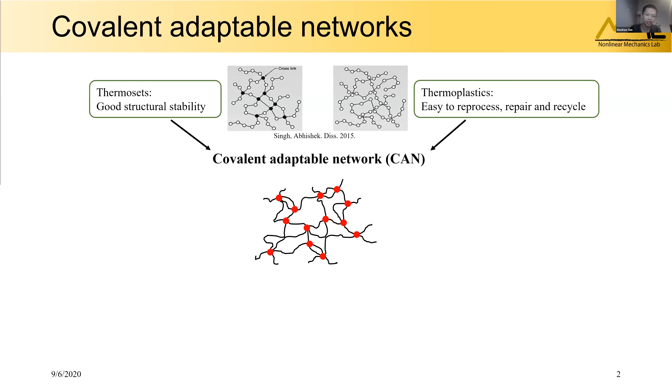Such novel behavior is enabled by the dynamic bonds functionalized into the network. The dynamic bonds can continuously break and reform and result in the evolution of the topology. The bond exchange reaction is a typical class of dynamic reactions. It can be triggered by different stimuli, light or heat.

In a BER, a free unit will get close to a linked bond and form an intermediate group, which can then break into a new unit and a new bond. In this process, the microscopic network is rearranged and the cross-link density is preserved. The repeated BERs will allow the network to flow macroscopically, but without impairing the structural integrity. So many different CAN materials have been developed.

In 2011, the Leibler group developed a CAN material based on the thermally induced BERs. The Vitrimer has shown the capabilities of reprocessing, repairing, and recycling. For example, through a simple thermoforming process, a Vitrimer strip can be permanently reshaped. And for the repairing, two Vitrimer strips can be welded together under heating.

The Vitrimer can also be recycled. The broken parts of the Vitrimer can be recycled to new parts through injection molding. We, in 2014, have also demonstrated the Vitrimer can be recycled from the powder through a heat press process.

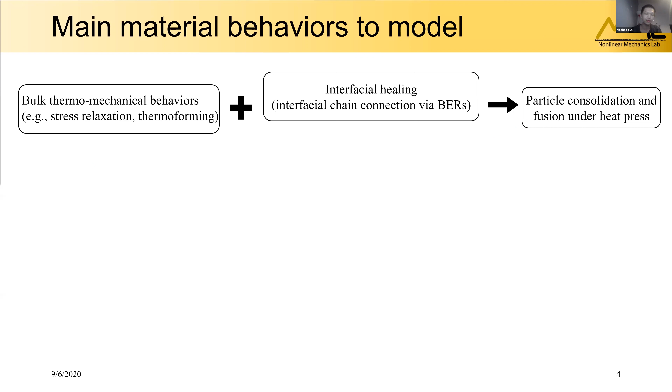So in the above applications, there are two fundamental behaviors, the bulk stress relaxation behavior and the interfacial healing behavior. The two behaviors enable the capability of particle consolidation and fusion under the heat press, which is a fundamental process underlying this powder-based recycling. So our work is to understand and model these material behaviors. We will first focus on the bulk material behavior, the thermomechanics of the Vitrimer, and then using the interfacial healing model developed by Yu, we will study the consolidation and fusion of the Vitrimer particles under the heat press.

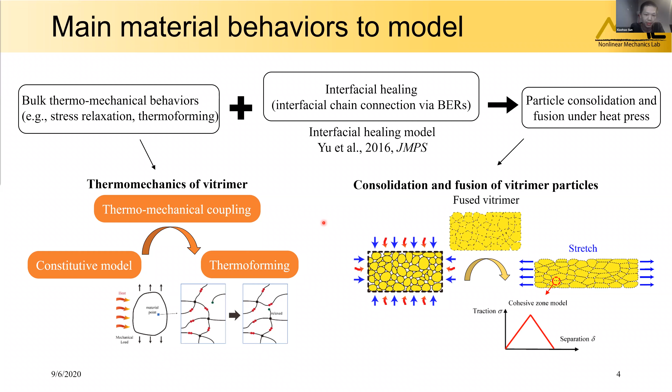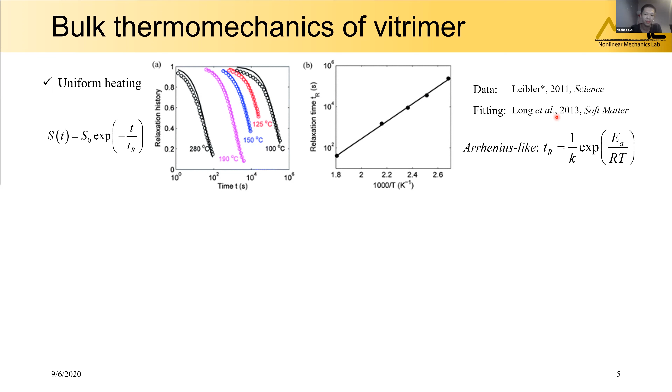So for the bulk Vitrimer behavior, the previous studies have focused on the uniform heating case. Since the reaction kinetics are governed by the Arrhenius law, the material also exhibits Arrhenius-like temperature-dependent relaxation behavior. That is, the relaxation time scales with the exponential of 1 over temperature T. Long in 2013 developed a constitutive model for the Vitrimer, which can capture the experimental behavior of the Vitrimers.

However, for the non-uniform or local heating, the coupling between the mechanical deformation, heat conduction, and the chemical reactions can be more complex. The heat conduction causes an evolving temperature field. This can lead to the evolving deformation field in three aspects: the BER-induced stress relaxation, the thermal expansion, and the modulus change due to the entropic elasticity. So we will focus on studying the coupling between the thermal and mechanical, and study the thermoforming process.

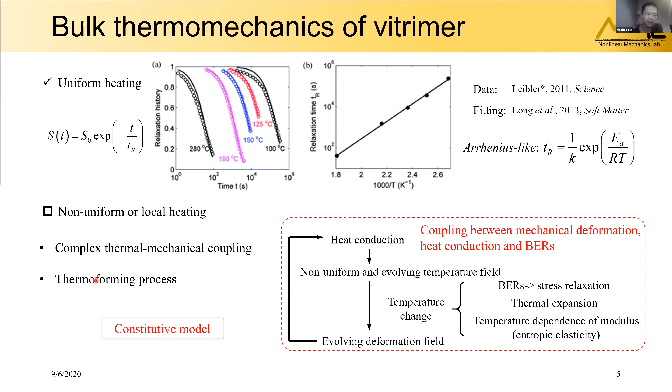So first, I will introduce the constitutive model developed by Long. So consider a material point subject to thermal and mechanical loading. The chains within this point can exchange through the BER. A basic assumption for BER is that the stress carried by a reacting chain will be relaxed after the BER, and the new polymer chain is born at a stress-free state, and it will start to accumulate deformation since its reforming state.

So to obtain the total stress of this material point, we need to track the evolution of the chain composition, that is the original polymer chains and the reformed chains born at different times. So the original chains experience deformation from time zero to the current time t, and the reformed chains born at time tau will experience the deformation from tau to t. So we can sum up the stress of different chain groups and obtain this form for the Cauchy stress. And the evolution of the chain composition is governed by the reaction kinetics, that is the Arrhenius law.

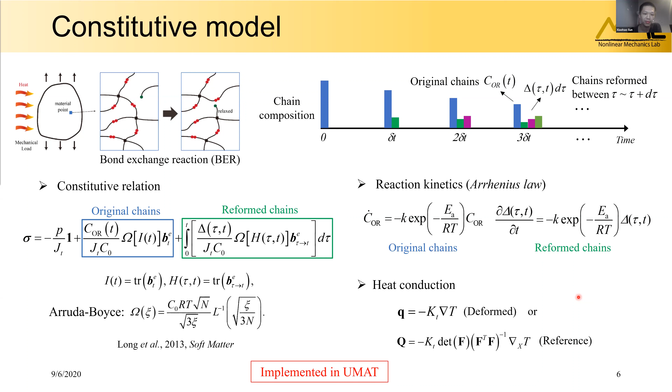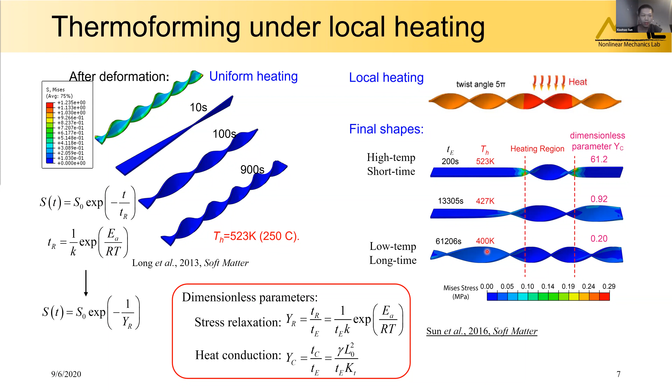There is another example for thermal imprinting. We use a high temperature rigid indenter to press a low temperature Vitrimer substrate, hold the indenter for time TE, and unload. The heat can be conducted from the indenter to the substrate and induce the stress relaxation, so an imprint can finally be obtained.

When the heat conduction is relatively slow, that is, high temperature and short time is used, the high temperature will be confined to the region near the contact interface. Then the localized stress relaxation can cause the material in this region to be compressed more, and then it will creep up due to the Poisson's effect, finally forming the final imprint significantly deviating from the initially deformed profile.

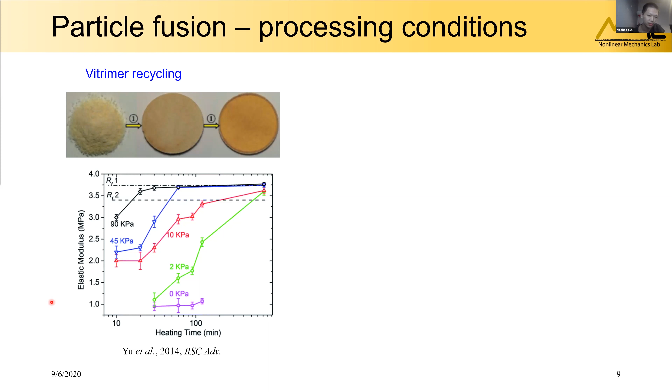So now we go to the particle fusion. This is motivated by two questions. In the application of Vitrimer recycling, different pressures, as shown by different lines, and different heating times can lead to material with different elastic modulus. And in our recent work, we have demonstrated the rapid fabrication of fiber reinforced Vitrimer composites based on heat pressing the polymer powder and the carbon fiber mat.

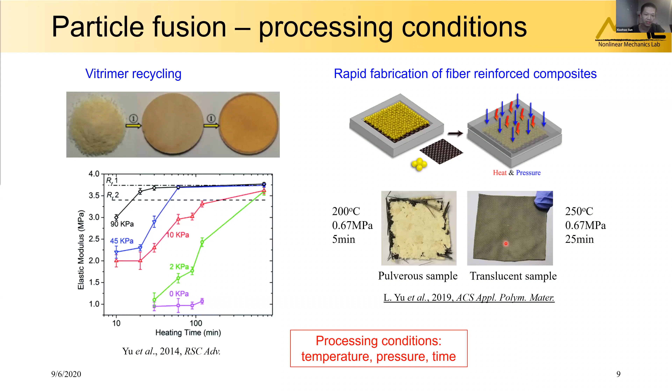We also see that the temperature, the pressure, and the processing time can significantly affect the fusion quality of the Vitrimer matrix. So how the processing condition affects the fusion process is the first question. Also, the Vitrimer powder shows a very random particle size. How the particle size affects the fusion process is the second question we want to answer.

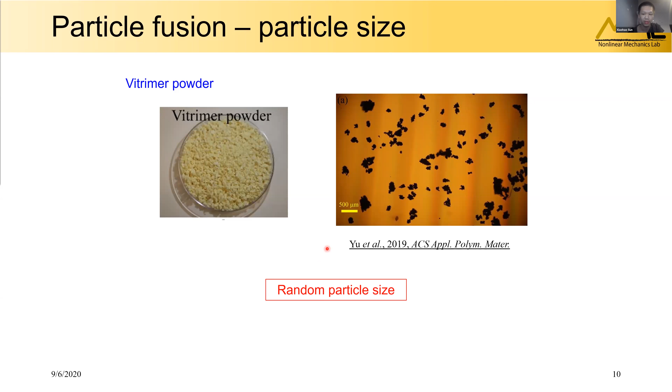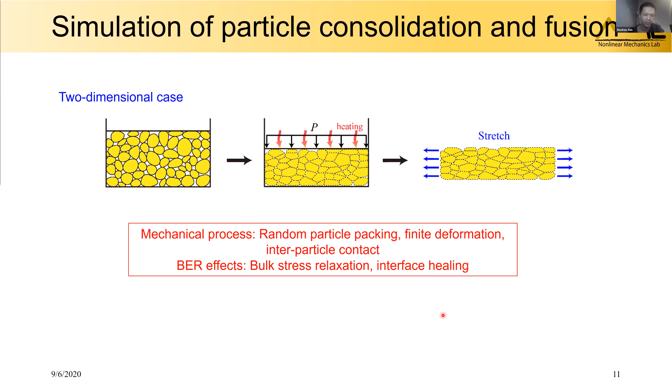So we will build a finite element model for the problem, and the two-dimensional case is considered here. For the mechanical process, the random particle packing, the finite deformation, and the interparticle contact will be considered. Also, the bond exchange reaction induced stress relaxation and interface healing will be modeled. So this is the simulation procedure.

We first put the particles into a box and shake the box to obtain an initial dense packing for the particles. Then we use this packing as the geometry of the finite element model and perform the heat press simulation. During the heat press, the interface healing between the contacting particles can bond the discrete particles into a fused continuum. The extent of the interface healing is governed by the density of the molecular bonds established across the interface due to the BERs.

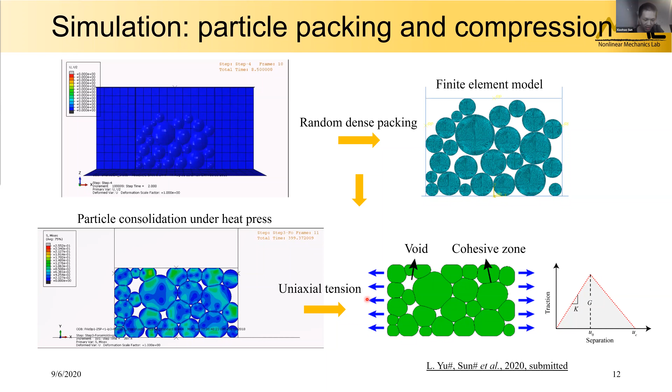The pressure does not appear here, but in practice, the pressure may also affect the healing if the surface roughness is considered. Note that the derivation of this formula has assumed molecular scale contact between the two surfaces, while surface roughness can prevent the uniform contact between the two surfaces and results in a smaller real contact area A than the nominal contact area A0.

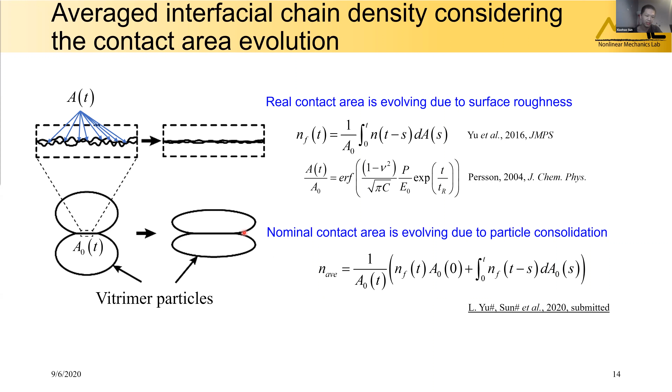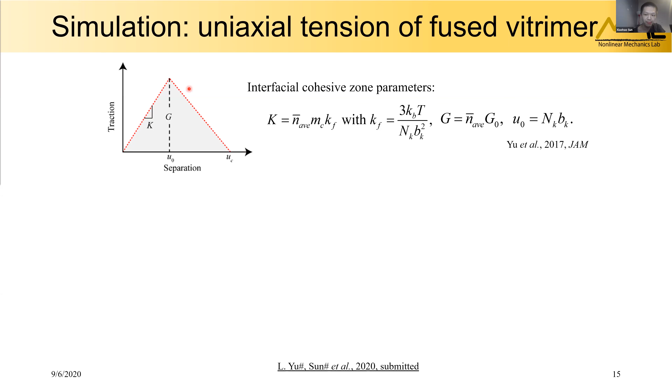And at the macro scale, during the heat press, the nominal contact area A0 can also evolve. So to consider this effect, we use a similar strategy and obtain this average chain density for each contact interface between the particles. And once we have the chain density at the interface, we can determine the cohesive zone model. Then we can simulate the uniaxial tension process. Here we can extract the effective stress strain curves and calculate the modulus and the strength from the curve. We can see the particle system has been broken.

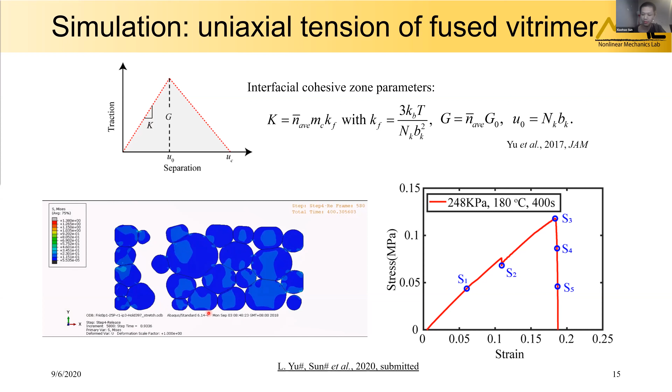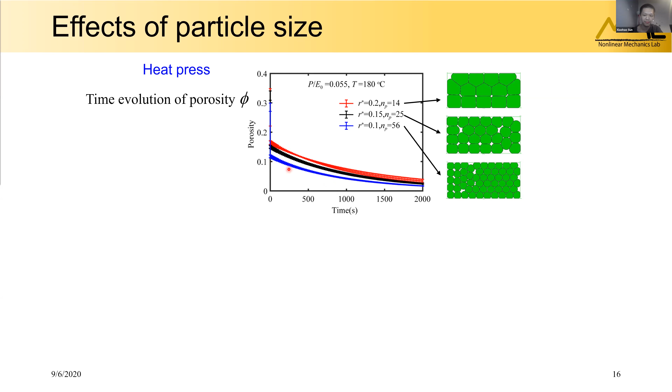So first, using the model, we study the effects of the particle size. We consider 3 cases with different particle sizes. For the heat press step, the 3 cases show slight differences in the porosity evolution. From the uniaxial tension step, we obtain the modulus and the tensile strength. They show no significant difference in the modulus. Such insensitivity can be simply explained by the rule of mixture that the effective modulus scales with 1 minus porosity phi. Since phi is on the order of 0.1, the effective modulus is not sensitive to its change. However, the strengths show much difference among the 3 cases.

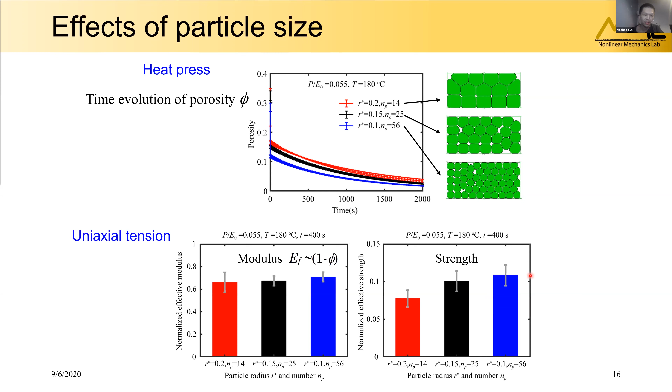To understand this, we plot the probability distribution of the interfacial chain densities. On the right-hand side is a snapshot of an example case. For each interface, an interfacial chain density can be calculated from the healing model. If we extract the interfacial chain density for all the interfaces, we can plot their probability distributions for the 3 size cases. The results show a similar median chain density, so the median degree of healing cannot explain the difference in the strength.

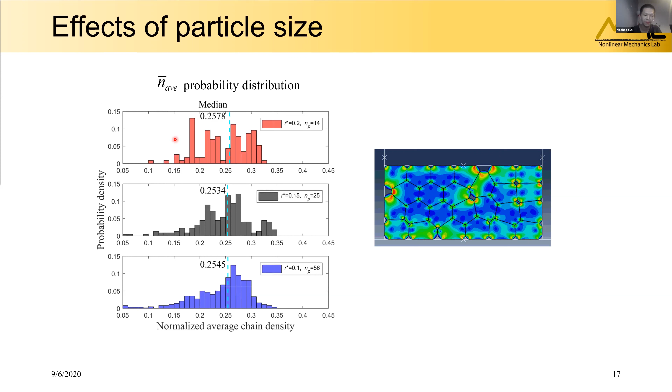But the variation in this chain density can explain it. For the smaller particles, the interfacial chain density is more concentrated around the median value, meaning most interfaces have similar healing extent, and there are few weak interfaces. While for the larger particle cases, the chain density is more randomly distributed in a wide range, meaning there are more weak interfaces that can facilitate the structure failure and lower the strength. Therefore, the strength is governed by the uniformity of the interfacial healing degree when the median is similar.

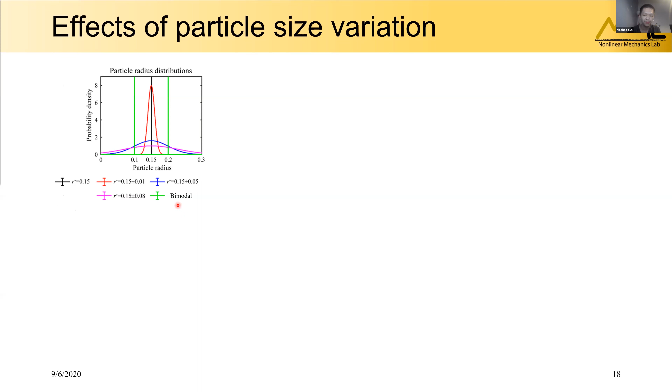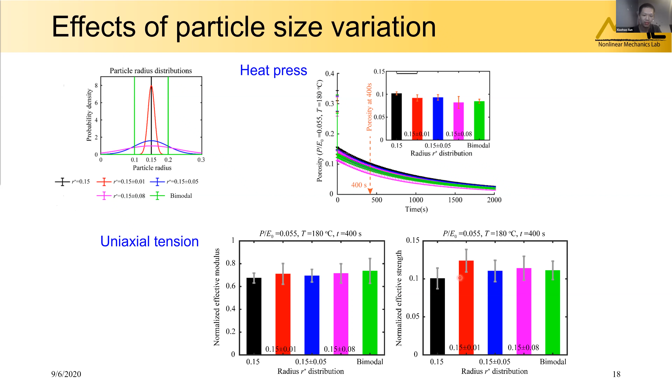So now we study the particle size variation effect. We consider non-uniform particle sizes in 5 different cases with the same average size. The first 4 size groups follow the normal distribution with different standard deviations. The 5th group uses 2 distinct particle sizes. On the right-hand side, we show the porosity evolution for the 5 cases. We see that the particles with mixed size show lower porosity than the equally sized particles, implying better consolidation. And from the comparison of mechanical properties, we again see the particles with mixed size can achieve a higher strength after the fusion.

So here is a summary. In the first part, we developed finite element models for the thermo-mechanical behavior of the Vitrimer under a non-uniform temperature field. In the second work, we developed a model to study the consolidation and fusion of Vitrimer under the heat press.

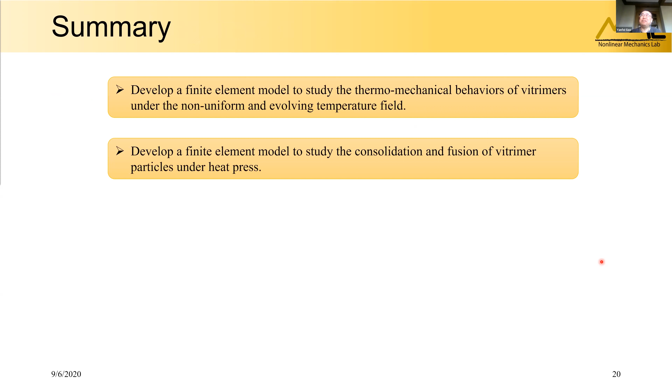Hey, very nice work. So I think I finally understood some of your work. I heard Ronglong's talk before and couldn't understand, so now I have a better understanding. Very nice work.

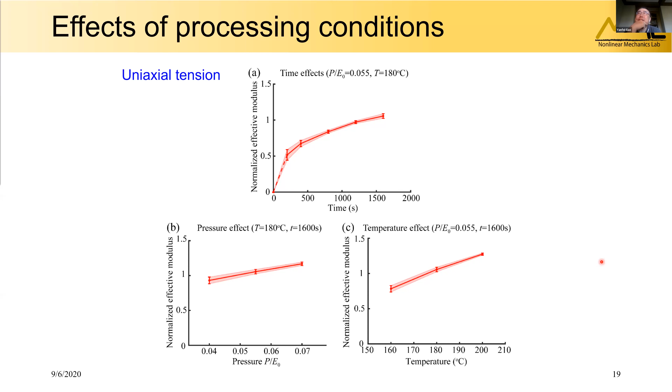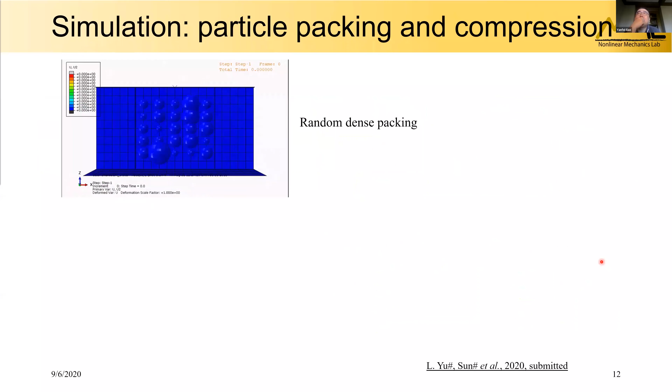I just have one confusion about your earlier talk on this forming. In one of your simulations, you showed this indentation, two spheres, and then the material in between got squeezed. My general question is, I don't know much about softer materials, but when people try to do this kind of thermoplastic imprinting for metals, you would hope that at a very high temperature, the metallic materials would flow very easily and follow whatever your imprinter's shape is.

But the reality is failure is very common. The metallic materials would fail, and when you squeeze it, you actually chip the material, right? It's more like you squeeze it, then it gets fractured off the rest of the material, even at a high temperature. And sometimes even if you have printed the shape, the strength is very poor. So you already damaged the material. We can understand that metals probably do not prefer this kind of large deformation.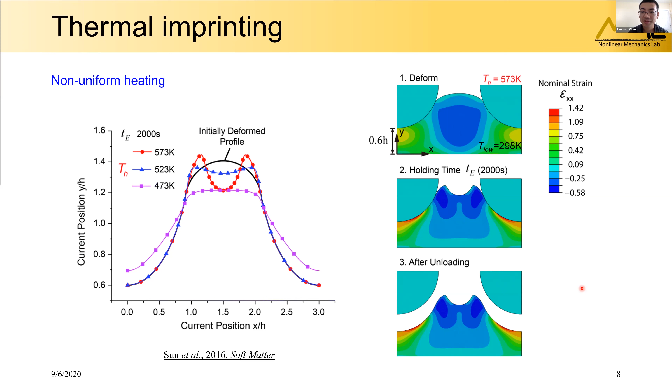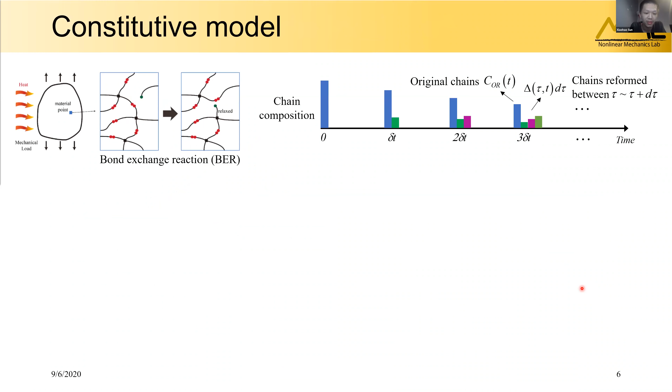So do people also make a large piece of Vitrimer just by polymerization? Sorry, you mean make a large piece by adhesion? By polymerization. Oh. Actually, the main application for the Vitrimer should be in the composite field, because this material is a thermoset, a cross-linked material, but it can be reprocessed and recycled.

So it has very good potential to be used to make composites, since usually composites are made of thermoset material, and once synthesized, it cannot be reprocessed and recycled. This leads to severe economic and environmental problems. So the main application for such material should be in composite materials.

Okay. So I guess the thermal imprinting is used to recycle the material, right? So, okay. It's just a demonstration of the local heating effect, the coupling between the heat conduction and the stress relaxation.